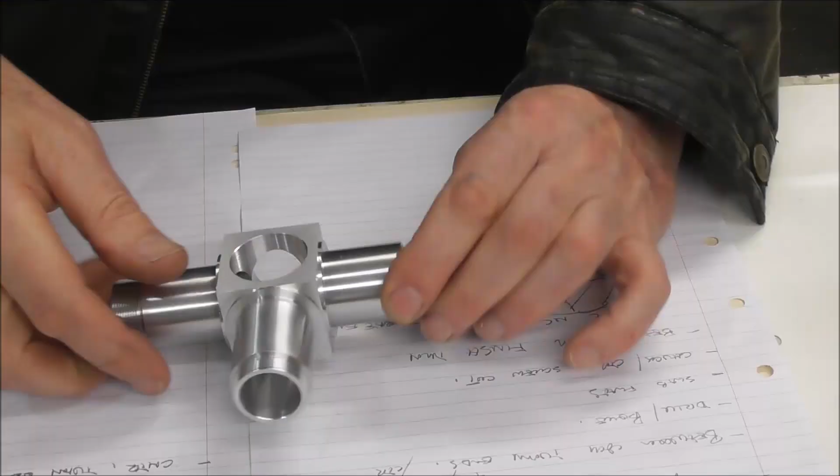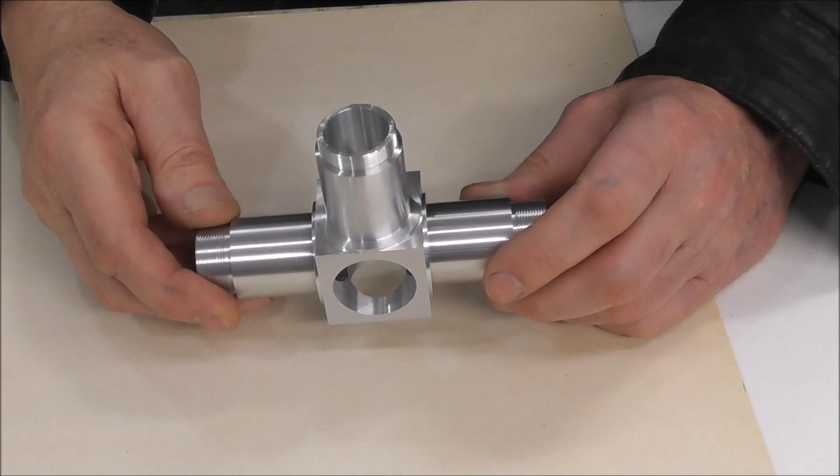I'd like to start off by showing you the part drawings and specifications, but you've got to be very careful about that. If you're quoting for a job, always think that the customer may well not want their intellectual property disclosed. So I'm not going to disclose who the customer is, or the drawings, or the specifications, or what the application for the part is.

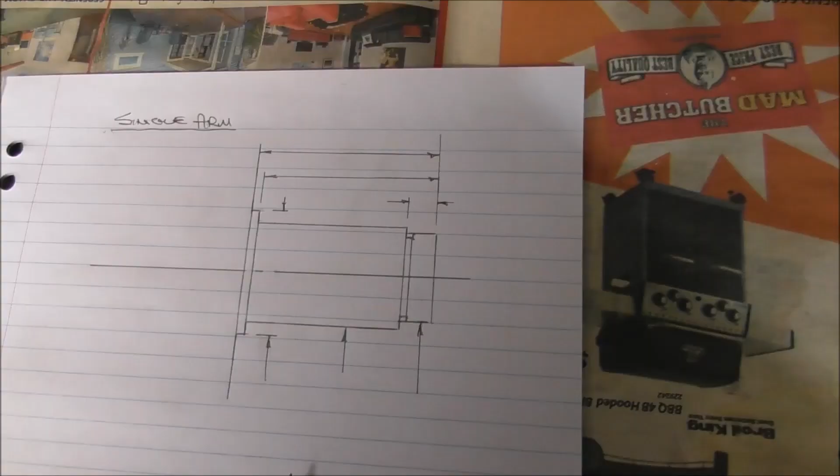Just have to suffice to say it's a high precision prototype part. If you're machining a high value part, you really don't want to risk making a single mistake. You've got to be super cautious, and usually the supplied drawings are not based off machinist datums. The machinist datum is usually the end surface as the Z, so I like to do a little local specific drawing on critical machining operations.

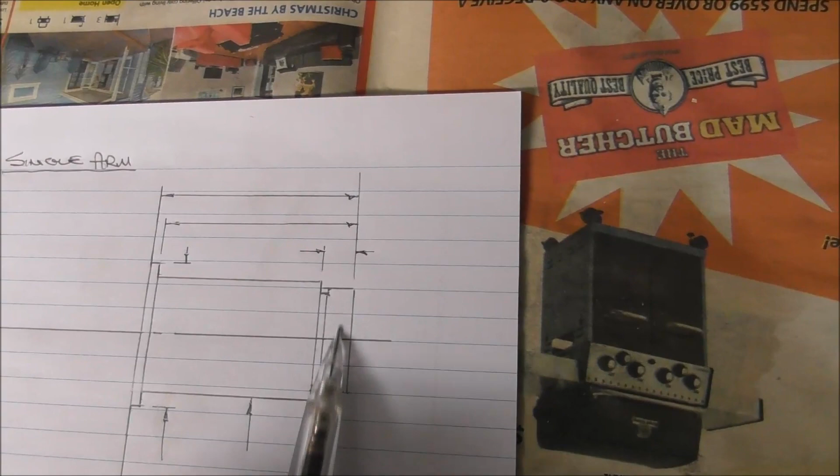This is going to be a thread and a precision diameter. And I put the dimensions here based off the end for the digital readout, or if you're on a CNC lathe for your Z0 program, and my key diameters here. So it helps if you put the drawing on a clipboard near the work and in the orientation of the work. You don't want to be reversing numbers and drawings in your mind. You need to free up all the brain power you can for the actual job.

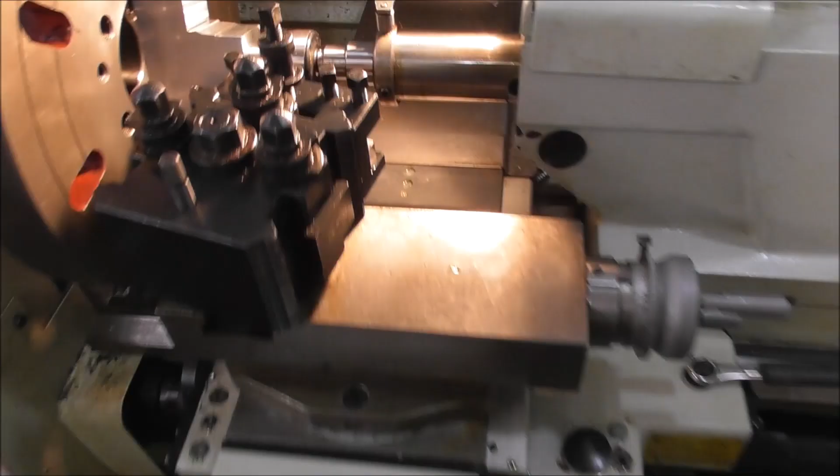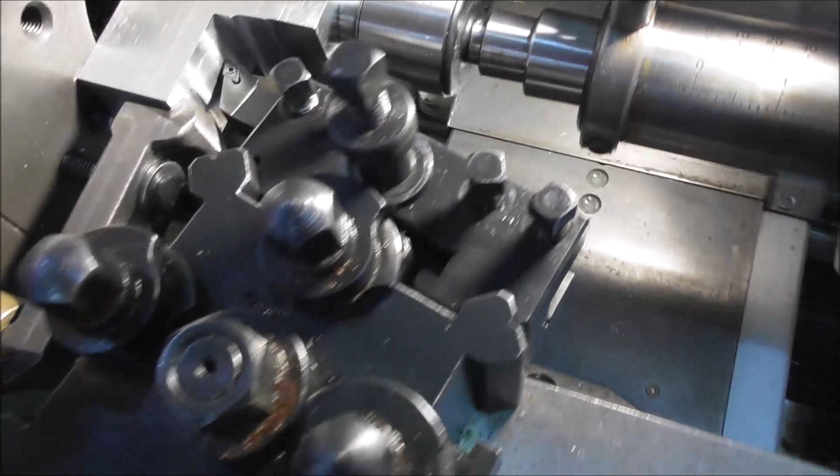Sometimes an alternate handed tool mounted in the front of the tool post gives you the best clearance for machining between centers, because the tool post is clearing away from the center here and gives you enough clearance there.

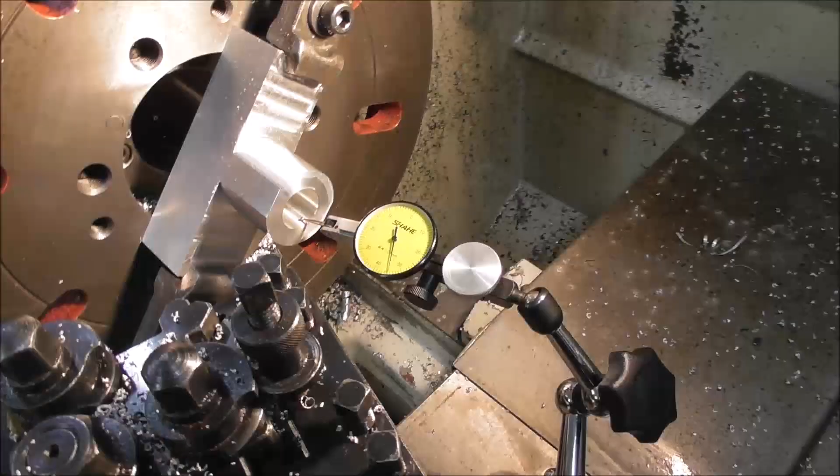It's a good idea once roughing is underway to remove the center and check that datum diameter is still concentric, because the machining process can release stresses in your stock, particularly if it's certain types of steel, heat treated steel or cold rolled steel. Aluminium's usually pretty good, and this doesn't seem to be letting go at all. There doesn't seem to be any stresses in there, so you can kind of move on a bit more relaxed, knowing that you've got a nice stable piece of material.

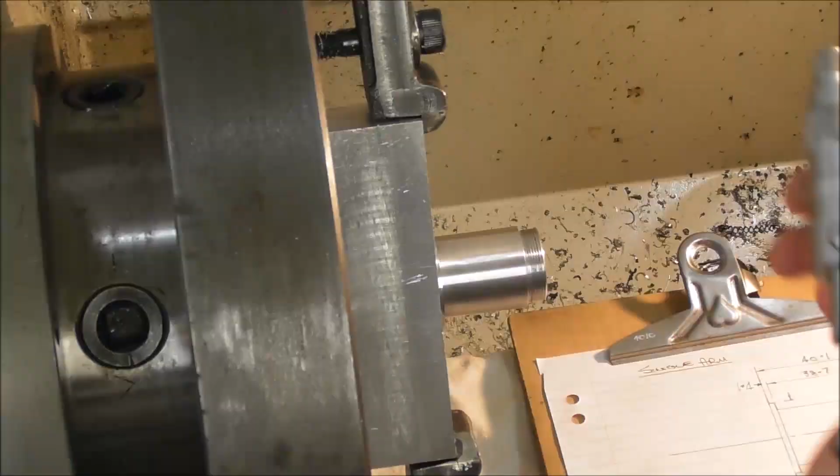Alright, so that diameter should be a high finish at 30.04. To 30.02. That's 30.03, that's correct.

That thread should be 26.97, that's clearance on 27 millimeters. 26.97. Oh, it's critical work this.

It's nerve-wracking. You know that with this sort of work you really can't afford to make a mistake, because it's one high value part, so you go really slowly and double, triple check everything. But the problem is that makes it even more of a high value part, and you've got even more to lose if you make a mistake and have to start again. So you're kind of on edge.

It should be stressful and an adrenaline process to keep you hyper focused, and in a way that's what I love about it. And when you finally finish and you breathe a sigh of relief, it's really satisfying to have made 100 critical machining operations without making a mistake on one of them.

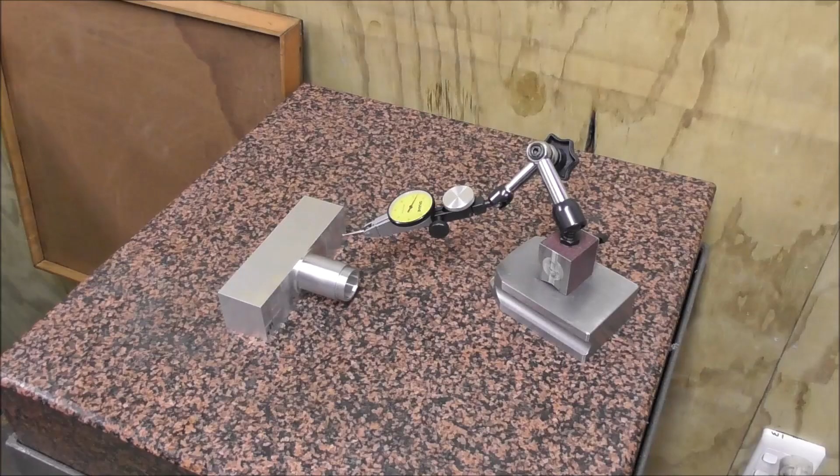Another advantage of the rectangular block method with the flat datums is that I can check after I've done each stage. For example, here with parallelness, just over 0, just before 0, about 1/100th of a millimeter, half a hundredth of a millimeter. So that's pretty well within 1/100th of a millimetre of parallel and central. That's really good. Whew. So far so good.

Let's check it the other way. Alright, so we are 1/100th minus, 1/100th minus, so it's nice and perpendicular. One-hundredth plus, 1/100th, just over 1/100th plus, so it's very perpendicular, and it's about 1/100th of a millimetre off centre. That's less than half a thou off centre. Well, I'm happy with that.

That's a big relief. Well, it takes a lot longer in the 4-jaw chuck setting by this method, but still it's not too bad. I'm coming in there to 20, spin it round.

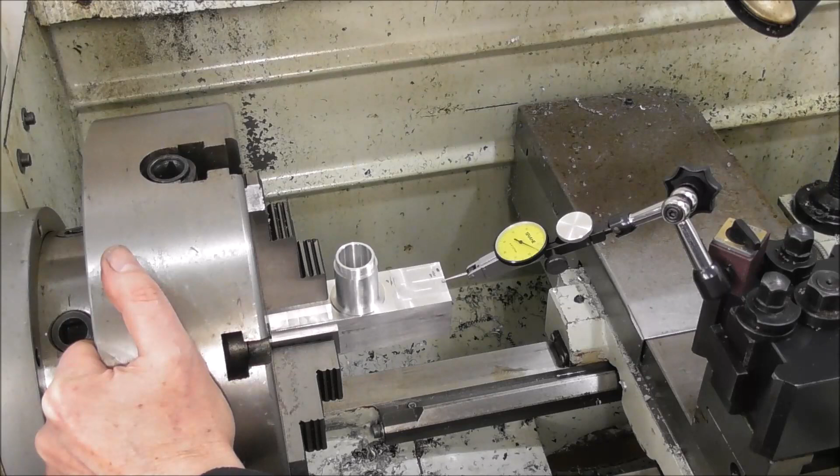Twenty that way, parallel that way. I was a little bit concerned with how critical it was that this dial indicator needle is in the middle of the part, so I've deliberately gone off 2 millimeters, and sure enough it shifts the needle to 15 now, but it's still central, because now it's 15 on the other side.

So the part's on an angle effectively, because the dial indicator is 2 millimeters off center, but it still works as a comparator between this rotary position and that rotary position. So it's still able to tell whether it's central or not, even though the dial indicator is off center, as long as you don't shift it in its X position between one measurement and the next. Although it's better if it's close to the middle, it doesn't actually affect it.

So we're 20 there, 20 there. Now I've got to get it right the other way. So having those hardened steel parallels in the slightly curved jaw faces helps a lot to hold the whole thing in line and not impinge on the part. The system works a bit easier.

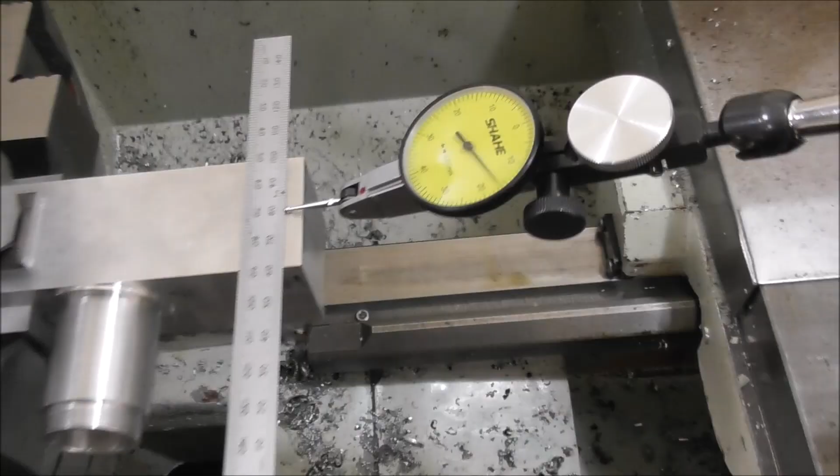It's a little bit easier to use if the stylus is as close as possible to the middle. You can line it up with a ruler and set your digital readout on 0. That's not difficult. In one direction, I needed to put a very fine shim under one end of the jaw. It was beyond tapping range of getting it parallel, and that's probably an error in a jaw of the chuck or in the jaw slideways.

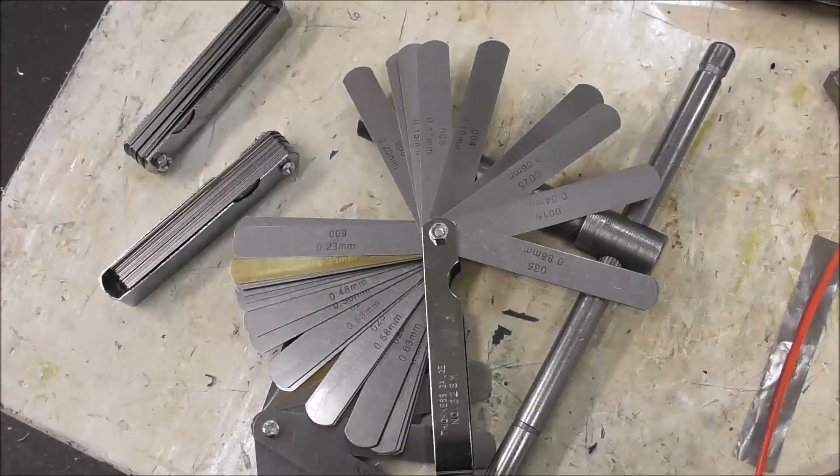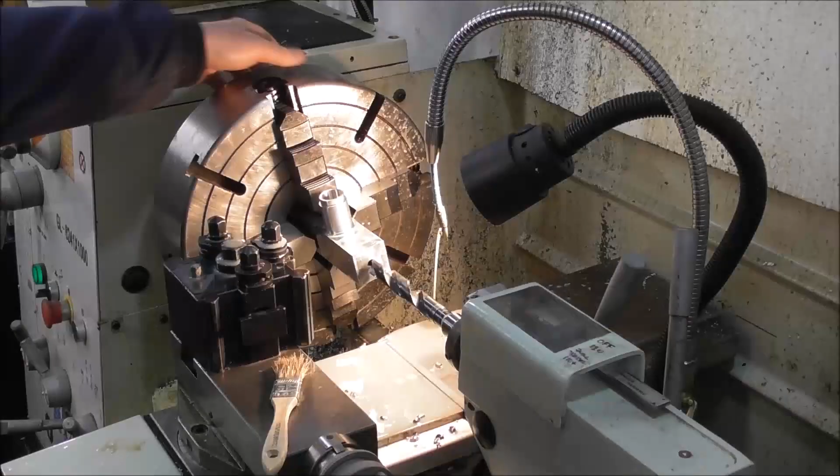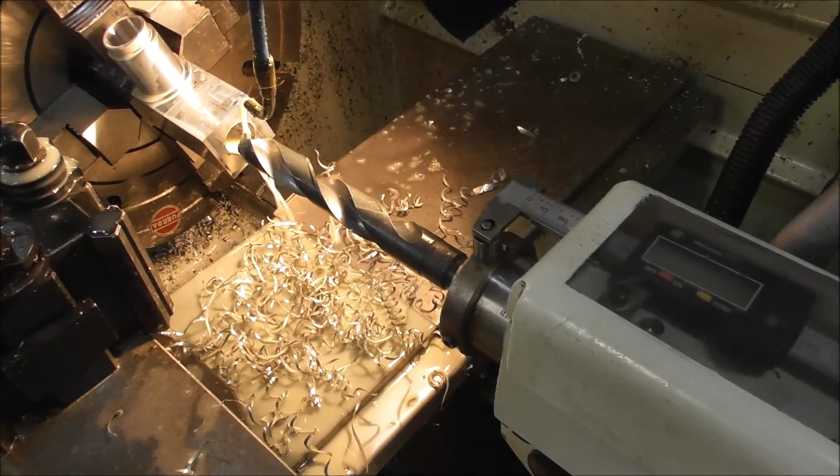Here's a quick tip for newbies. If you need to retract your quill because you're drilling a deep hole and slide the whole tailstock in, don't do that while the part is spinning on high value work, because if you slam the drill into the end of the hole while it's spinning, that puts a huge torque on the part and it could shift it.

So after rough drilling, before I bore it out and machine the center for the reference datum transfer, I'm checking that nothing's moved, because when you're machining, you're introducing vibration and pulses to the part and the chuck. And remember, the chuck are opposing jaws under tension, so it can settle into a slightly different position if you're unlucky, and you need to catch that before you start to machine your reference center.

Another reassuring double check is you can stop a thou away from the finished AF across flats diameter and look at the remaining section. I don't know if you can see it there, but they look really even and parallel. There doesn't have to be much out for it to look uneven.

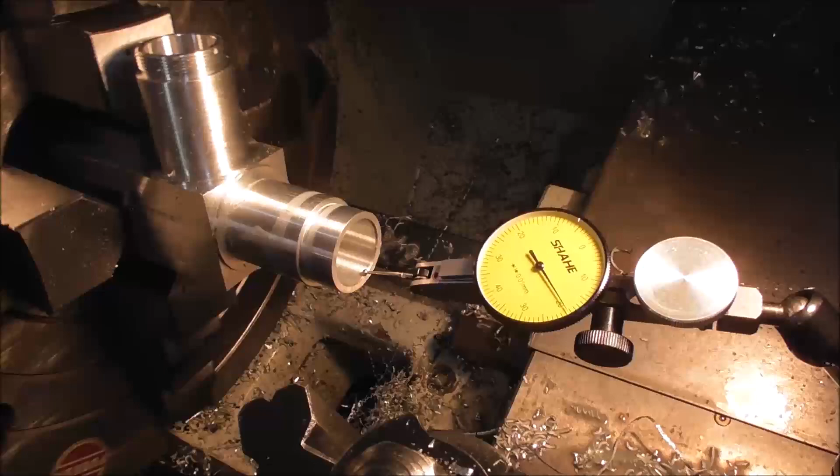And after I've finished rough machining, I can put the dial indicator on that reference diameter that I transferred the datum surface to, and see whether it's shifted, whether the material has let go any of its stresses, or whether it's shuffled itself in the chuck a little bit. It's just over 1/100th of a millimeter run out. That's half off center, you know, 5 or 6 microns. That's not enough to worry about. That's within the range of totally acceptable.

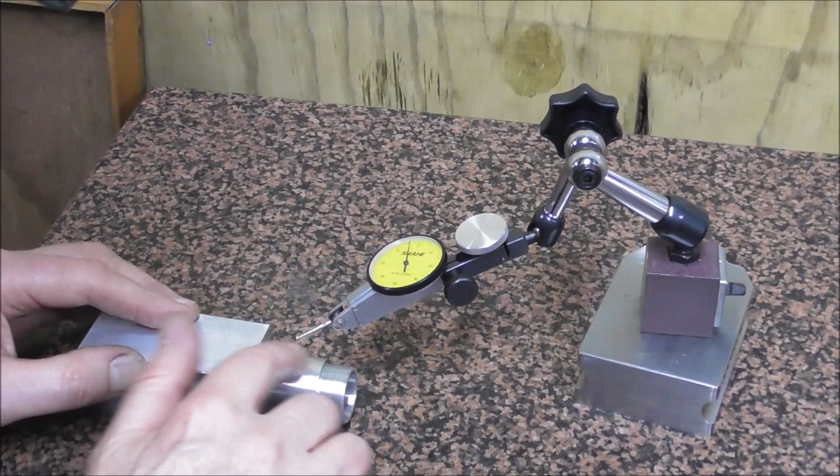Well, let's just double check we're still on accuracy track here. I've left a little bit on this diameter so I can chuck on it if it gets a bit scuffed, and then finish machine it. But let's see how central it is.

21.5, 21, 22, 22, 22, just over 21.5. Well, that's great. That's within 1/100th of a millimeter. So we're still hanging on to that initial accuracy.

Mentioned it before in other videos, I have my 3-jaw chucks all floating on their back plates. That is, this clearance on the locating spigot, and you can just nip up the mounting screws and tap and get perfect concentricity with your 3-jaw. It's amazing how many people don't do that, and it's absolutely essential for doing accurate work.

So now I can dial in central and parallel, and just tap the chuck when it's eccentric in the high position against gravity, so you're tapping it down with the screws just nipped, and then you can tighten them up when you've got it accurately in position.

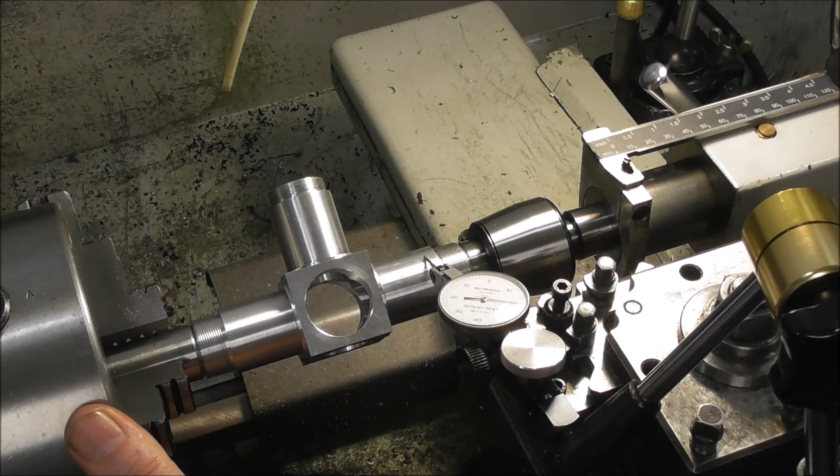After all that machining, including that central hole, there's obviously very little stress in the material, and it's just stayed to its original shape. So now I'm just going to finish turn that diameter that I was chucking on. The other side is also running the same concentricity, so the whole thing is very accurate. I'm really relieved and pleased about that.

But some of you might be thinking, well, why didn't you just machine the whole thing between centers? That was one of the options I was considering. The problem is that you're cutting threads and turning something down from square to circular. There's intermittent cuts there, and you've got to drive that somehow with some sort of drive dog that doesn't mar the already machined surface, and there had to be a lot of thought given to that.

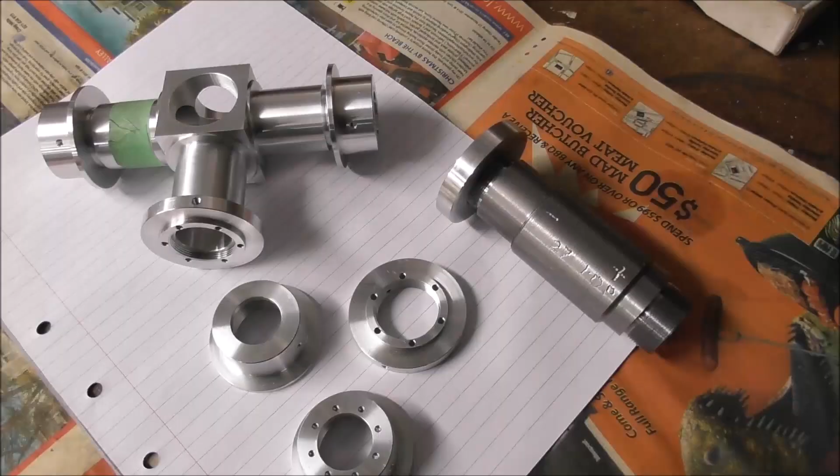So I thought, no, I'll just machine it, holding it on the rectangular part, apart from this final check and machining of that diameter. So when you're initially planning the machining procedure for your parts, you need to think about all the different ways, the manual machining methods and the CNC machining methods, and how suitable each is. If possible, you want to do it by a CNC process that can be more automated, but that's very much dependent on the geometry of the machined surfaces and also the number of parts.

Initially, the customer only wanted one part, one set of fitting parts, and so I couldn't justify CNC. There's a lot more setup time, programming, and double checking time with CNC. But if I had to make 10 of them, I'd do virtually everything that I could on a CNC lathe and a CNC mill. But because it was only one part, it was quicker for me to just manually machine the whole thing.

And now I've finished it, the customer realized he actually needs two parts. So I would have used a slightly different procedure if I'd known that from the beginning, to more efficiently process the machining stages - perhaps a little bit of CNC in some of the parts, like the thread cutting and so on. But now that I have to make a second one from scratch, again, it's not worth working out the procedure for CNC and automating it. So I'll just play it safe and copy the exact procedure all over again. It will be quicker, but it won't be significantly quicker, because I'm going to be manually machining the second one.

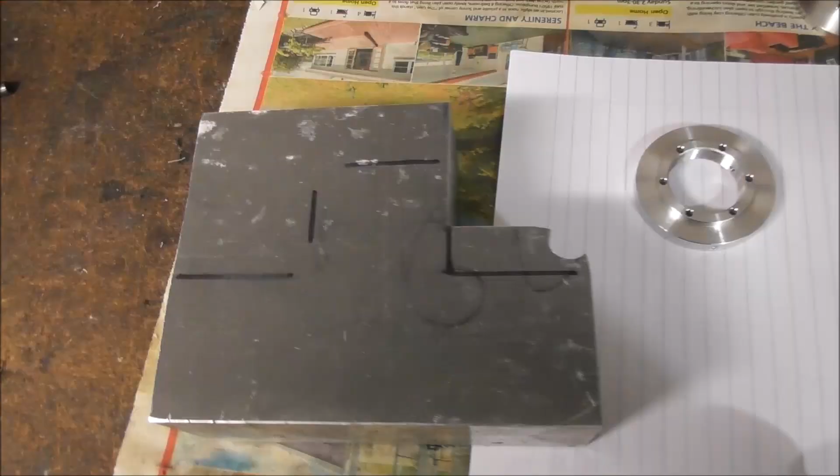So second time around, the first thing I'm going to do is carefully felt pen mark out the profile a couple of millimeters bigger than the part so I can bandsaw it out. Choice of material is very important here.

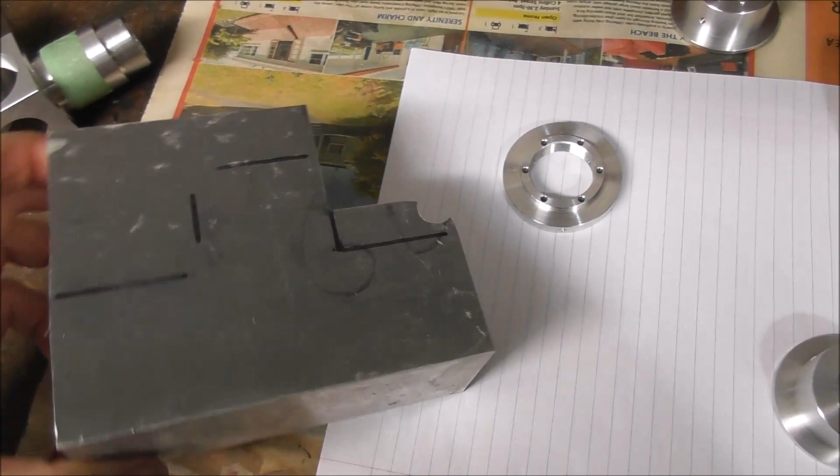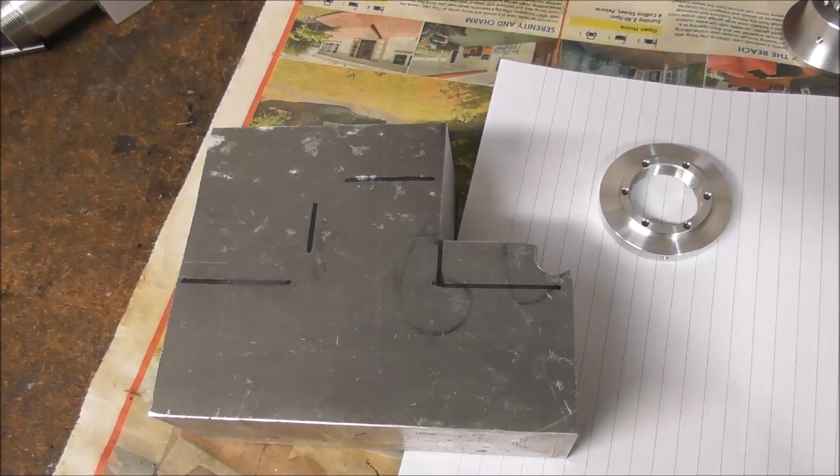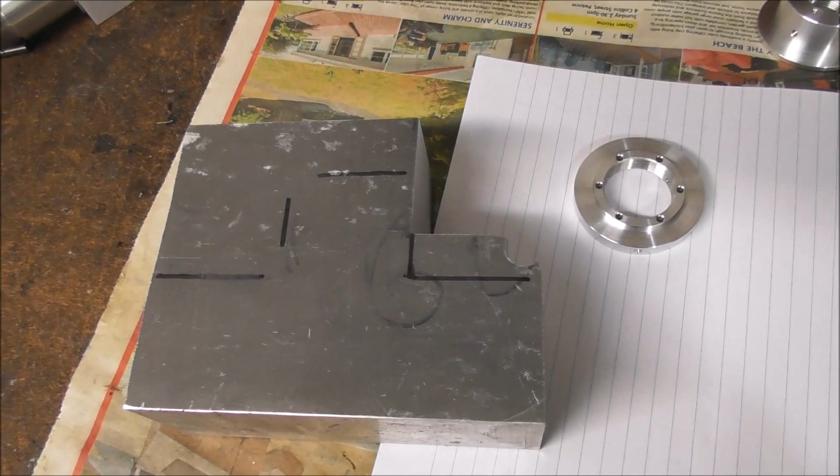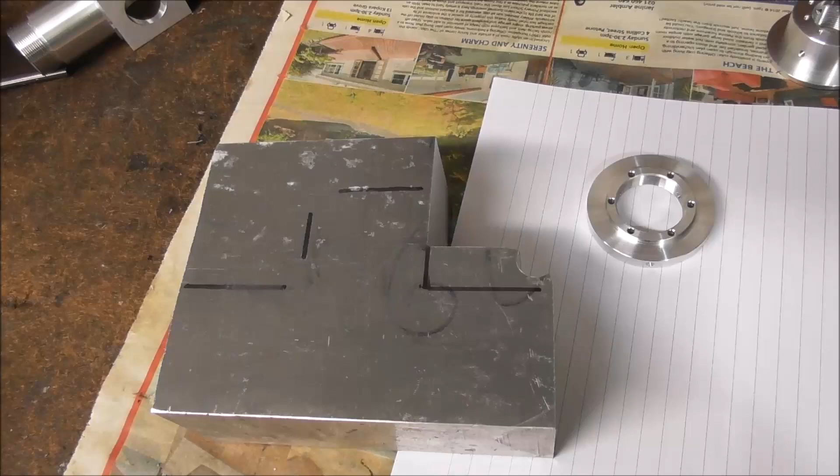This is a bit of 6061, but not all 6061 is equal. Very important to realize that you can get a very stable grade of 6061. I can't remember the code number of it, but you need to identify it as a machinist's grade of 6061, which is very different from an extruded 6061. Don't make the mistake of buying a piece of extruded 6061. You need to specify that you need machinist's grade, because the extruded 6061 is highly stressed, and when you machine it, it'll shift like a piece of wood, and you'll end up, if it's a precision part, wasting your time. You must get a machinist's grade.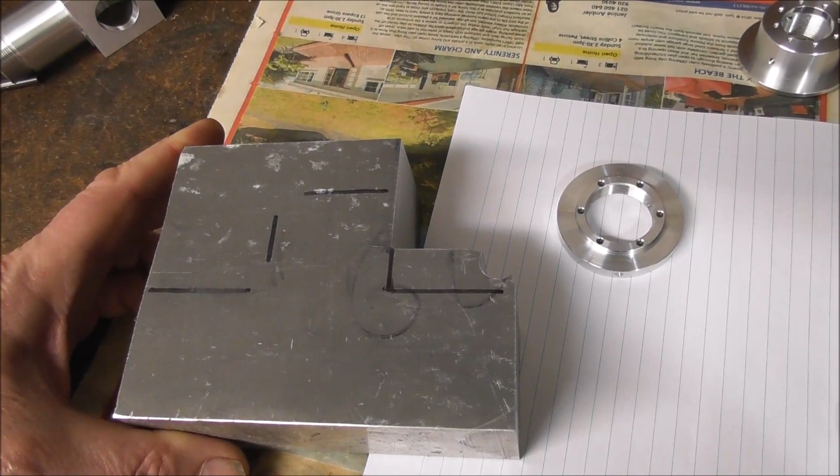I think it's more of a cast process of making it than an extrusion process of making it. If there are any experts on the subject of the making of 6061, please put some comments in underneath this video. It'd be very useful for us all.

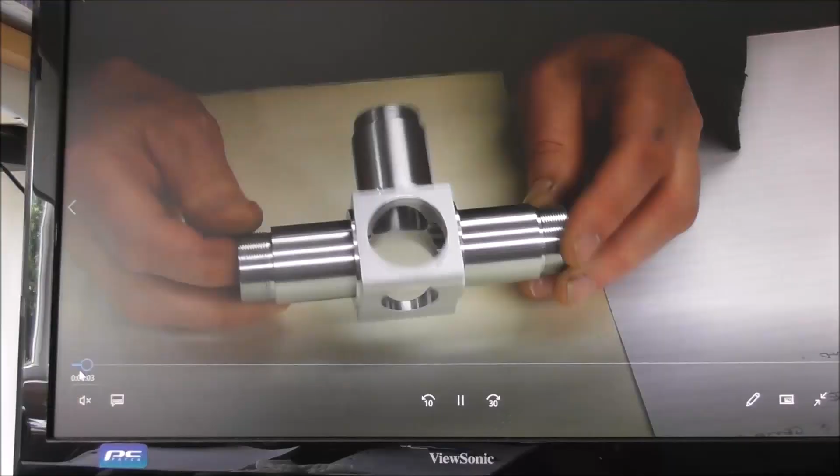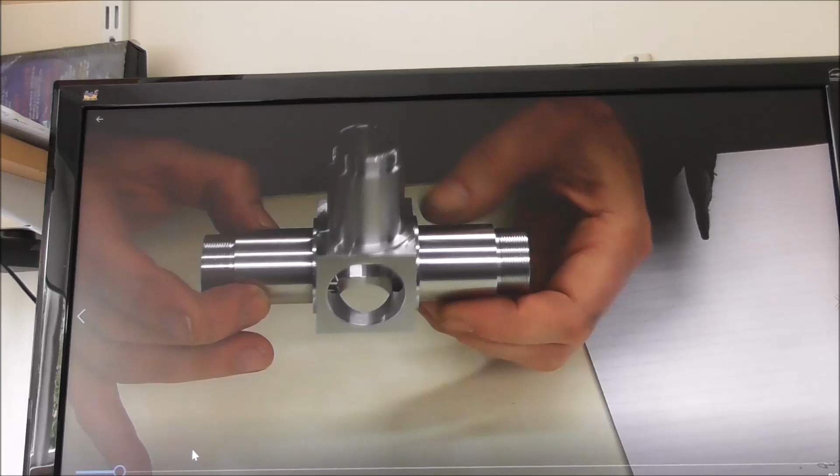During the manufacture of this part and a similar project, I've taken a lot of clips or scenes, and there's a lot of different tips and tricks, probably too many to put into one video. So I'll probably split them up into about 3 videos.